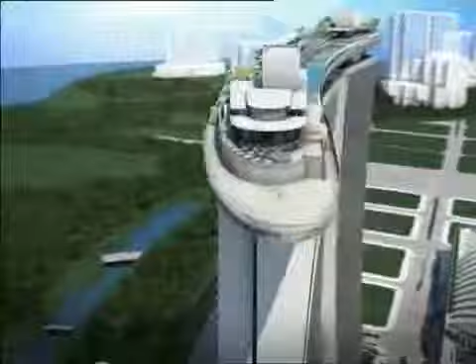Singapore's Marina Bay Sands is one of the world's most complicated construction projects. Engineers have to build not one, but 3 skyscrapers that will shoulder a sky park as big as an aircraft carrier. Worst case scenario, we get stuck.

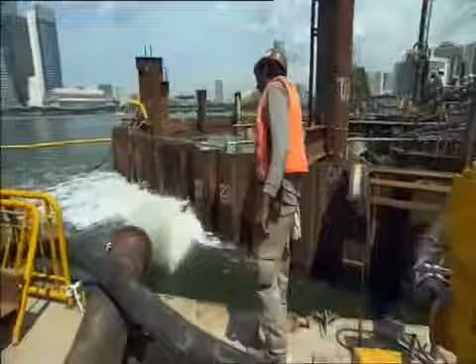They have to devise ingenious solutions to assemble a 60-metre tall museum of impractical dimensions, install giant artworks, and erect seemingly floating pavilions for shopping and entertainment. If engineers succeed, they will create a virtual city unto itself.

Singapore, the Southeast Asian country, is smaller than New York City. The lack of space forces it to build its largest leisure and entertainment hub to date on a small tract of reclaimed waterfront land. The Marina Bay Sands. It's not one megastructure, but many. Serious challenges lie in the array of buildings that form the unique complex.

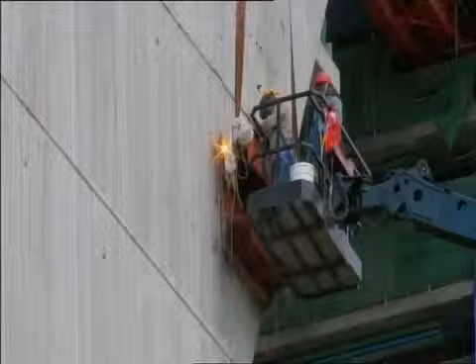3 55-story hotel towers slope at such great angles, they're in danger of buckling under their own weight. An even bigger problem is the hotel's roof. A 340-metre sky park spans its length, containing gardens, outdoor pools, and the world's largest cantilevered observation deck. But how do you build something as big as an aircraft carrier, 200 meters in the air?

In the hotel's atrium, mammoth works of art have to be somehow incorporated into the architecture. Its challenging centerpiece, a 15-ton mass of steel by a renegade artist from Britain. A 60-metre tall art science museum is designed for maximum visual impact. It will be to Singapore what the Opera House is to Sydney. Only one problem. It seems too impractical to construct.

And a set of dramatic glass-encased pavilions, while themselves pose little challenge, have to be built in water. The man behind the Marina Bay project understands the risks, but he believes that anything short of astounding will fail. Sheldon Adelson, one of the world's richest men and CEO of Las Vegas Sands Corporation.

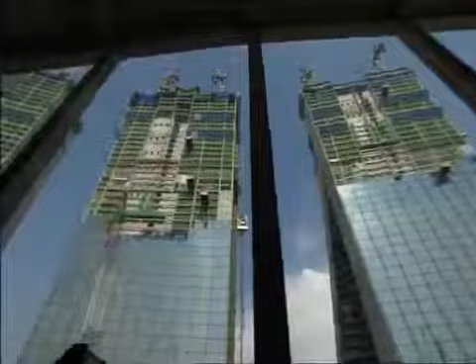What we hope to accomplish is to change the face of Singapore tourism. So we expect a very successful development. That is by far the largest and most expensive single project we've ever undertaken. It'll cost about 5 to 5.5 billion US dollars. It's a lot of money. Now, I know $1 billion doesn't buy what it used to, but by any measurement, it's a lot of money today.

Adelson believes his huge investment is safe in the hands of Moshe Safdie, a world-renowned architect. Safdie is recognized for his use of dramatic curves and geometric patterns. The Marina Bay complex will be his largest and most difficult project yet. I think that architecture has to be timeless. Therefore, what it espouses, what it provides, needs to be something that has a long life.

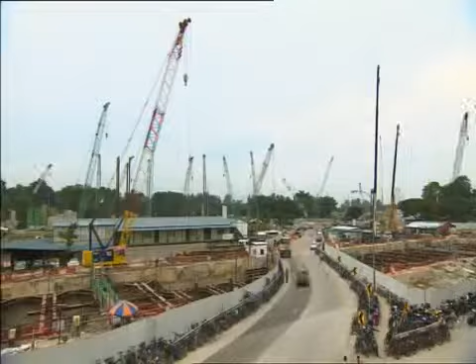What's unique about Marina Bay is all the pieces coming together. You can't think about it as individual buildings. You've got to think about it as a piece of city. It's much more a symphony than it is a sonata. On the ground, engineers are more concerned about the reality of building Safdie's vision. This is the north retail section area.

30-year veteran John Downs is in charge of overseeing the entire project. The design is very, very diverse, and each component of the project is totally different from the others. For a project of this size, with the planning, the design, the construction, you'd be expecting somewhere between 6 to 7 years. Here is basically a 3-year turnaround.

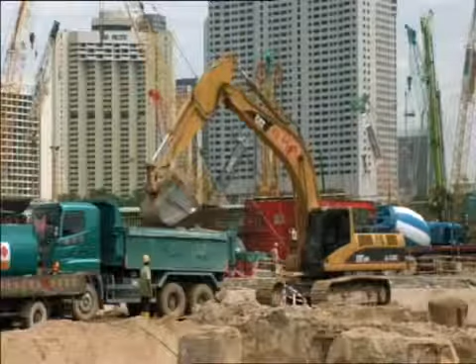The first and most critical construction task is to secure the footprint, though this normally straightforward job proves otherwise, since the site was originally allocated for boats. The complex sits on 560,000 square meters of reclaimed land, part of a decade-long plan to revamp Marina Bay, a former saltwater estuary that's now a freshwater reservoir.

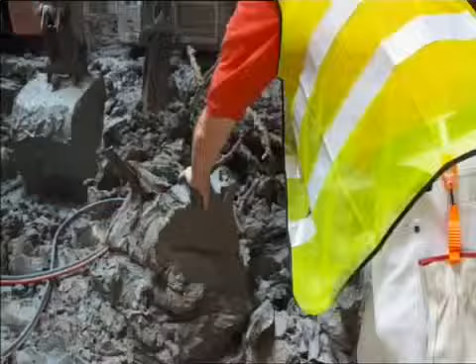Beneath the reclaimed land, which is essentially a seabed, is a dangerous layer of marine clay. Sometimes called black toothpaste, marine clay has very poor structural properties. If not given complete respect, the unstable marine clay is potentially fatal. In 2004, Singaporeans discovered the lethal consequences firsthand. A routine excavation in an underground tunnel for the mass rapid transit network causes a collapse, creating a gaping hole in the Nicoll Highway, killing 4 workers.

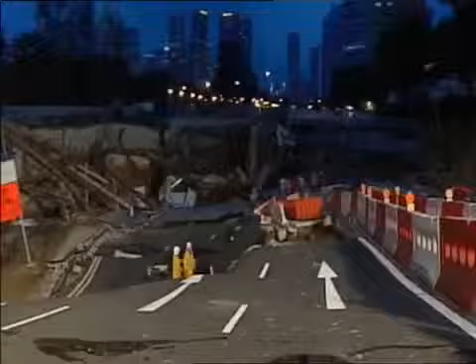The ground conditions in which they were building the Nicoll Highway were not dissimilar to those we are encountering here. They had also soft clay, they had similar depths of excavation between 20 and 37 meters. One of the big things that was learned in the Nicoll Highway collapse was the importance of monitoring movements and the control of quality as the construction proceeds.

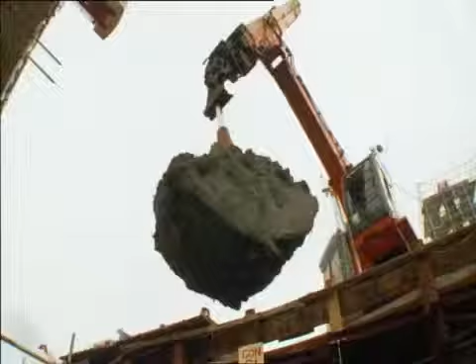Marine clay is an old foe of engineer Mike Barton. He's defeated it in the past by understanding how it behaves. The big problem with marine clay is that it is so soft that when you dig out the inside, the walls will move and potentially collapse and allow all the surrounding water in the bay into the excavation. So, before work can begin, the unstable building site needs major fortification.

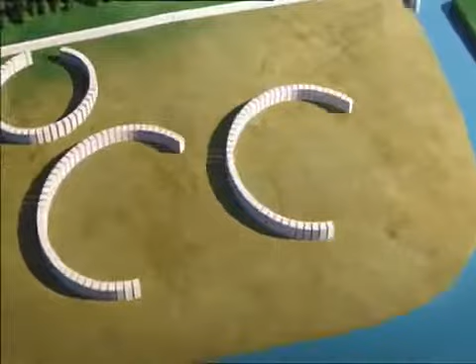To combat marine clay, engineers decide to build giant concrete walls to create stabilizing perimeters for the larger buildings, known as diaphragm walls. Up to 1.5 meters thick, diaphragm walls are steel-reinforced concrete sections, pounded 50 meters into the ground. They form watertight enclosures for men and machines to work round the clock.

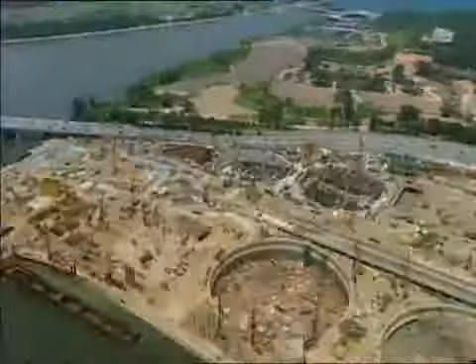In just 1 year, over 4,000 meters of diaphragm walls help produce a rock-solid foundation. The diaphragm walls that we constructed in a formation which we called a peanut formation, which is 2 circles joined together, and a donut formation, which is circular, is that they are able to withstand very, very large forces from the marine clay without any movement. They encapsulate an area that's bigger than a football pitch that enables us to excavate very quickly and to build structure up very quickly.

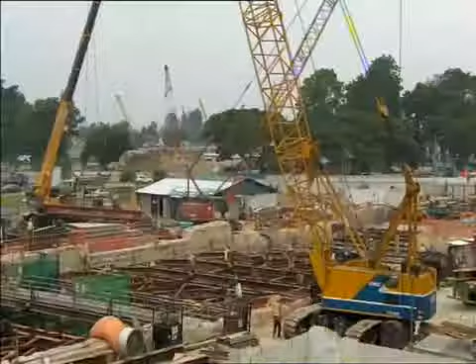Securing the footprint of the Marina Bay project has already taken a year out of John Downs' schedule. He now faces the difficult task of erecting the resort's many buildings in a space of just 2 years. Just managing the whole logistics of that, including the construction methodology, is very, very challenging for us. To meet his tight deadline, Downs chooses the most direct solution. He hires 16,500 workers to construct every single building, simultaneously. It's like leading a small army. So organizational excellence is key.

We're just on the edge of Singapore in the CBD here. So rather than lose the contractors and the workforce to go off-site, we built our own 3-story project office. We have all of our contractors, our subcontractors here. We house our resident site staff. We have our project management team. We have our construction management team, our design management team, and the logistics here.

Come lunchtime, the monster workforce creates another massive challenge for Downs. He responds by building one of the world's largest site canteens. We've got 13, 14 different food styles here. You can see by my shape and size that I eat here every day. I enjoy this food. So here you can see the project bakery. It has its own ovens. It's set up for breakfast. We cater for sandwiches during the course of the day. Can I take a sausage roll, please? So, freshly cooked food, straight from the oven. We stand by our products.

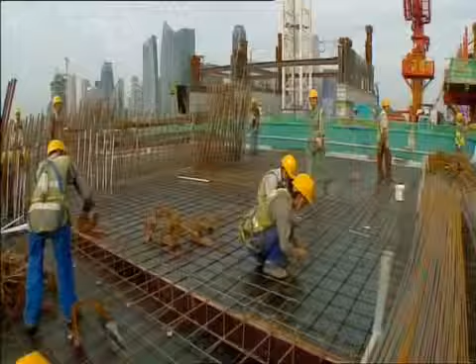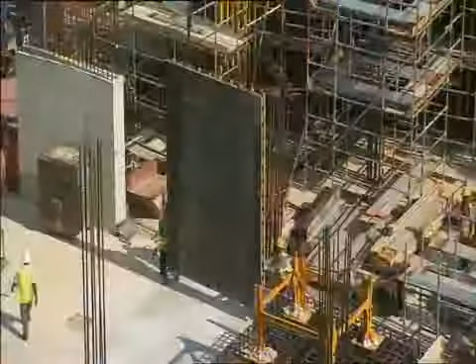The tight schedule also creates problems at the hotel towers, where engineers are already struggling with a congested site. The important thing to do is to make sure that they come in and deliver the goods straight away and then get out again. We don't want too many vehicles on site at the same time. To speed up construction and alleviate traffic congestion, engineers turn to a method that's proven itself countless times in the field: precast concrete. Hotel walls are made off site in the thousands. And workers laying the floors are so proficient, they produce 1 floor per 4-day cycle. It's an impressive display for a conventional solution. But the structure they're attempting is anything but conventional.

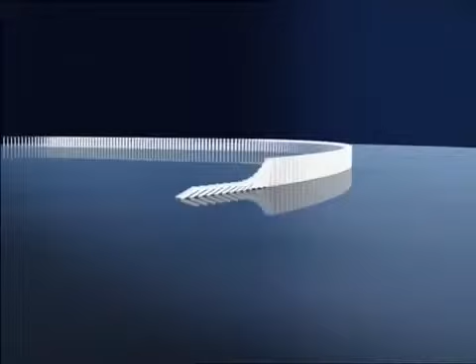The key challenge of building the hotel towers is its unusual design. Unlike other skyscrapers, part of the towers slope at incredible inclines. Like a set of collapsing dominoes, the towers could buckle under their own weight if a practical building solution is not found. It's a major concern for engineer Craig Glover. I've been in the industry for 25 years, done a wide range of projects in many different countries, but nothing compares to this whatsoever. There was nothing we could take reference from across the street on the next high rise or across town. This is a new frontier.

Costing a staggering $5.5 billion to build, the Marina Bay Sands could be one of the world's most expensive mistakes if engineers can't solve the tower's problematic structure. Engineer V.C. Cheong leads the design team, and their solution comes out of left field. If you look at the configuration, it's not a straight tower. It's with a sloping leg. So all this sloping leg actually is inducing a very huge external force onto the structure. We cannot build it without any support. So we actually formulate a solution to prop up the sloping edge.

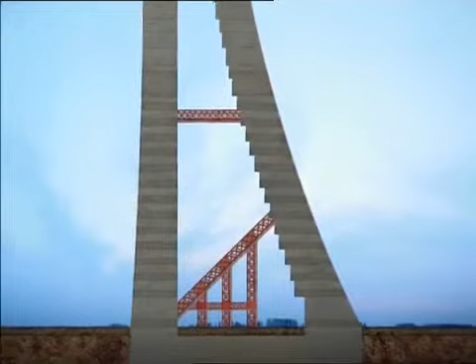Using a technique they've never employed before, engineers build large temporary struts made of strong structural steel. They prop up the sloping towers as they rise. Like a suspension bridge, high tensile steel tendons, also known as tension cables, give an added layer of support inside the walls. In theory, both the struts and the tension cables are temporary and will be removed once giant link trusses connect the towers at the 23rd floor.

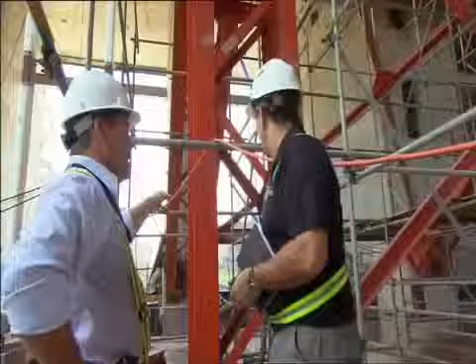The sheer weight in concrete is enough to topple the towers at level 8 if the engineer's calculations are wrong. To reduce the chances of failure, Glover and his team make a radical decision. Instead of removing the temporary tension cables in the tower walls, they make them permanent supports. I feel good it's in there because it's added strength, it's added support.

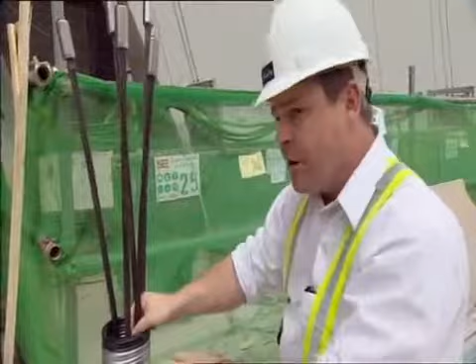We have a twined network here of high-strength steel, and what we do is we bundle these up so they form a cord with multiple strands inside this conduit. We place this conduit inside the walls prior to casting the concrete. Once the concrete is cast, we anchor one end into the concrete. We then put a very high-strength pneumatic jack onto the collar and one by one pull these strands through and tension them up. What that does is basically pull the building back and hold it in place.

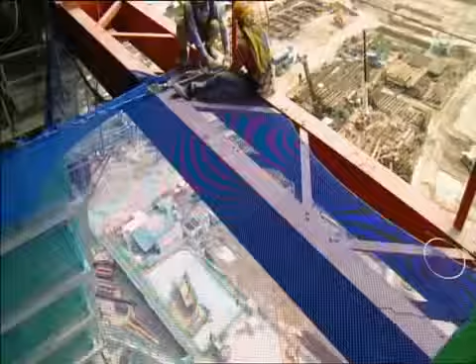If these cables were to suddenly break or if they weren't in place, we wouldn't be able to control the self-weight as we build more and more of the building up. So it's a very important part of the actual engineering of the solution to hold the building in place until we can connect it. Despite the team's quick thinking, the true test of their engineering decisions will only happen once the main support struts are removed and the massive link trusses installed.

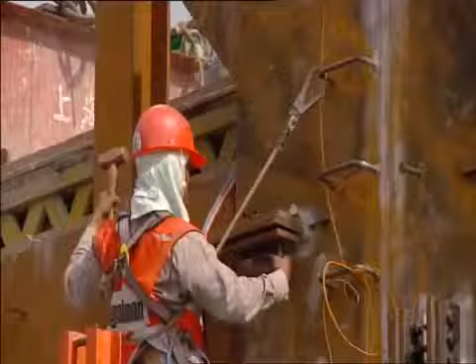Link trusses are huge reinforced steel brackets that bind the towers at the 23rd floor. Once their installation is complete, they transfer the sloping tower's weight completely away from its temporary struts. Once we're satisfied that we don't have any stability issues, then we can bring the large hydraulic cranes in and member by member start to dismantle the struts. We've got a lot of time pressure, so we've just got to make sure that these things keep moving. It's done its job holding up the building, now it's holding up the job.

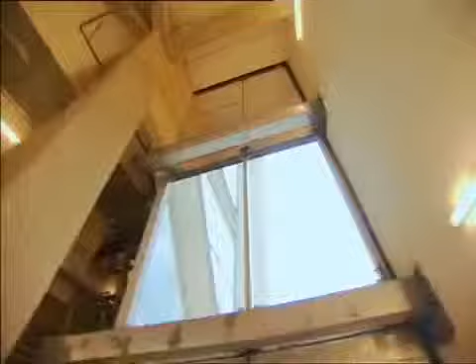As the last pieces of support struts leave the site, Glover and his team can finally breathe a sigh of relief. The link trusses are holding the building load. So far, so good. It's a lot of theory, a lot of calculations, but until you really do it and really get it out of the building, you never quite know. I'm always waiting for the phone call in the middle of the night that something's gone wrong.

Not all the structures have ended up according to plan. The 60-meter-high Art Science Museum is facing a major design overhaul. Planned as a venue for blockbuster exhibitions on the arts and sciences, its bowl-shaped roof doubles as a 3,000-seat amphitheater. Unfortunately for engineers eager to start its construction, architect Moshe Safdie isn't happy with its current shape. Somebody looked at them and said, looks like a bunch of bananas. In fact, Mr. Adelson said, looks like a bunch of bananas. I said, well, if they look like a bunch of bananas, we're not there yet.

It's terrible news for Safdie's design team, especially its principal, Gene Dyer. There are times that Moshe will come in with an idea. We think it's quite exciting. We'll pursue the idea for weeks or even months. He'll come back and say, I want to change the idea. And we've already bought into the idea, so it's a bit frustrating.

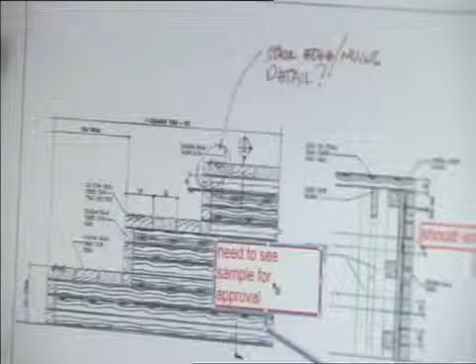To rework the unique geometry and dimensions of the Art Science Museum, Safdie and his team turned to advanced 3D modeling programs. It not only makes navigating the museum's complex geometric patterns easier, it shortens the process to a matter of days. The model is dynamic and it can be moved by just changing one or two elements. Moshe could experiment. He could make rapid judgments in a very short period of time about which way he wanted to take the project. This is a process that was impossible to do 10 years ago. Without the computer, this would take years and years and years.

Nautilus form effectively became... To rationalize the new look into a buildable structure, architect David Robbins splits the museum into spheroid segments. We began to look at using different spheroids to define the different upper and lower surfaces of this building. That gave us a very rational way of describing the plan form to our clients.

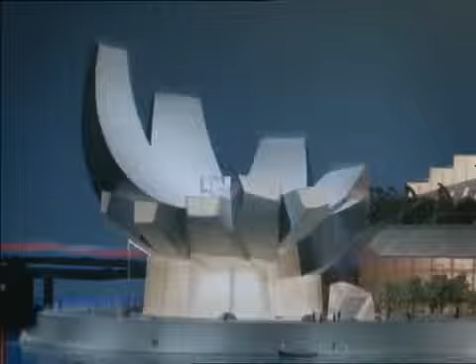After months of refining the design, Safdie is finally happy with the result. The mathematical precision that we gave them made them even more beautiful. It led some people to say, well, hand of welcome. Others said, is that a lotus? And the more ambiguous the associations, the closer I thought we were getting to our target. Because I think the least exciting buildings are those which have overt symbolic associations.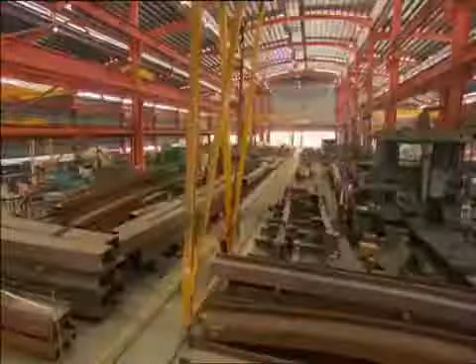Armed with the new design, engineers begin work on the museum's 60-meter-high superstructure. A staggering 5,600 steel elements, weighing some 5,200 tons, are prefabricated to exact specifications. They are then trucked onto site and assembled. It's like putting together a giant jigsaw puzzle. Each element has to be installed with pinpoint accuracy. If it's even a few millimeters off, engineers will have to start from scratch. Engineers of the massive atrium at the base of the towers are facing an equally tough construction process.

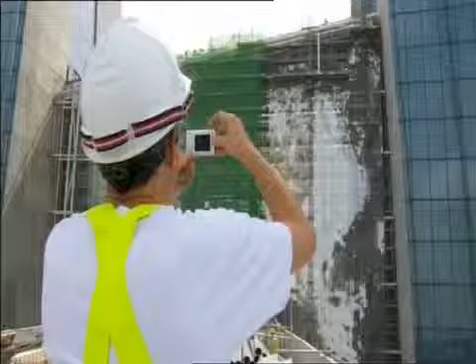Safdie has come up with a challenging design. He wants to inject art into the atrium's architecture, so that visitors will feel like they're walking through a grand Gothic cathedral. In medieval times, if you think of a Gothic cathedral, there's the architecture, there's the stained glass windows, there's the sculptures on the pinnacles. You cannot draw a line and say art and architecture. Art and architecture are one, they're singular experiences. And I think what we try to do here is come back to this integrative mode.

To create the centerpiece of his vision for the atrium, Safdie commissions renowned British sculptor Antony Gormley. Famous for his unusual approach to art, Gormley is the brains behind the Angel of the North sculpture in northern England. What he's about to attempt is proving to be more of a construction challenge than an artistic one. A cloud-like sculpture some 40 meters long, made up of 15 tons of high-grade stainless steel, hung 12 stories above the atrium.

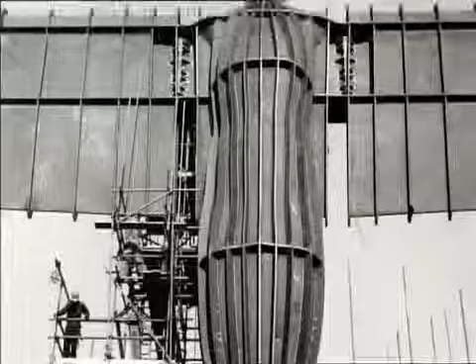The Angel of the North is, in a way, making a very traditional public sculpture because it's isolated in space at the edge of a valley. You can see it for miles and miles. It's very much about occupying space. This is about activating space. You can't see it for miles and miles. You have to be in the space with it. Each viewer, every person coming out of their hotel room will confront this big chaos thing and have to find their place in it. I think that's an exciting thing.

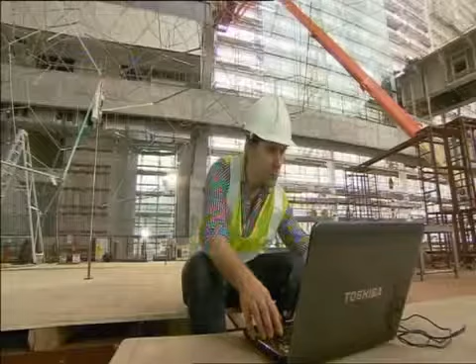Called Drift, Gormley's steel sculpture is so huge and so complex that it can't be sculpted using traditional methods. Gormley's team has to create state-of-the-art 3D computer programs that translate his ideas into buildable plans. But just as they're about to begin construction, a bombshell drops. September 2008, a global financial crisis wreaks havoc on markets. The flow of the hundreds of millions of dollars that keep the Marina Bay project going every month suddenly stops.

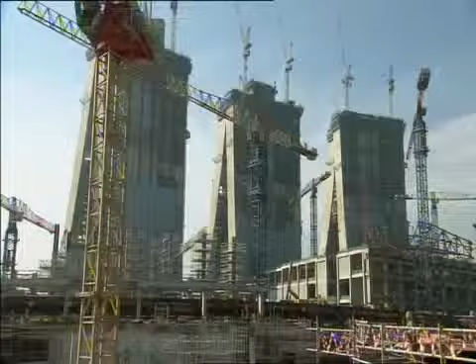For engineer Matthew Pryor, it's a massive blow. I feel devastated. It couldn't be worse. Probably the worst day of my life professionally. There's no more money coming through. So unless we put some funding in place or there's something, we're going to have to shut the jobs down. There's a tough decision to be made, and we don't know what we're going to do just at this point in time. With the future of the multi-billion-dollar project plunged into doubt, all eyes turn to the man behind it, Sheldon Adelson. The next move of one of the world's richest men will determine the fate of the mega construction site.

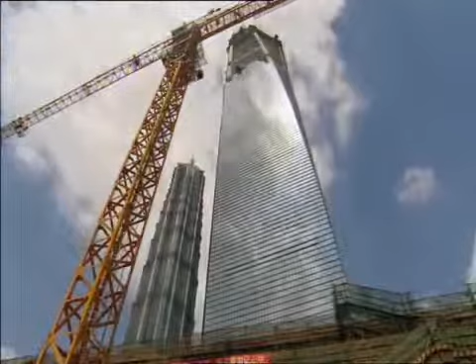The 2008 global financial meltdown is a haunting echo of the 1990s Asian crisis. Back then, progress on Shanghai's World Financial Center came to a complete halt for 5 years. For Adelson, that's simply not an option for the high-profile Marina Bay resort. His vision of changing the face of Singapore tourism is at stake. And so are billions of dollars of investment from his Las Vegas Sands Corporation. He prefers finding a stopgap solution to weather the storm. Throughout history, there has never been a trend that went straight up, nor a trend that went straight down. So it goes up and down. It's only a matter of time when things will recover.

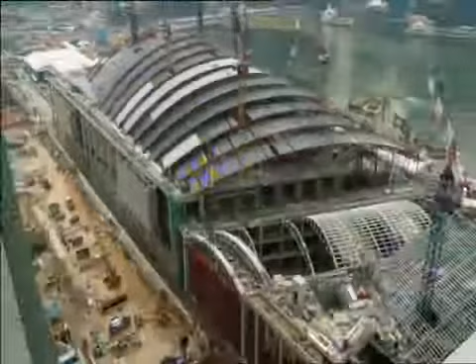In a bold move, Adelson pledges his vast personal wealth to the completion of the project, effectively ending any speculation of failure. There's a massive sense of relief in the company. Everyone pleasantly surprised how quickly we've got through this and the fact we could hold it together and get it going again. So euphoria is probably the best way to describe it. With the crisis averted, construction on the three 57-story hotel towers, the casino, theatres and convention centre resumes at pace. Everywhere you turn, steel is being installed. It's vital reinforcement for every concrete structure on the 15.5-hectare site.

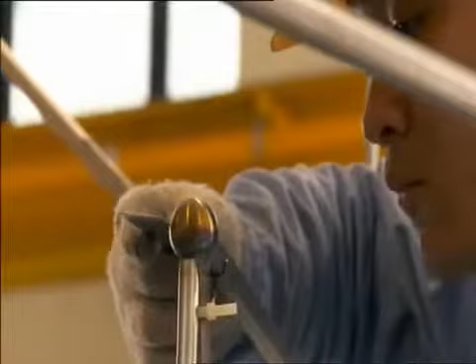For one project at the tower's atrium, steel is more than just reinforcement. To construct the 15-ton Drift sculpture by British artist Antony Gormley, engineers had to first laboriously prefabricate it into over 70 segments. The segments are then welded into 8 slices and will ultimately form the sculpture. It's a tricky operation, but engineers are able to complete it swiftly due to a system of codes and numbers that enable them to quickly identify what goes where.

Once all 8 slices of Drift are fully assembled, it's lifted up into position by a temporary lifting frame. A massive box truss on the atrium ceiling then takes over the load. In theory, the box truss will support the weight of the lifting frame as it's being lowered down. It will be a heart-stopping moment, especially for engineer Graham Stevenson. The lifting frame is about 9.5 tons, so when it picks up and gets some momentum, there's a potential that it just wants to flick over and rotate through its full 90 degrees, and we won't have it under control.

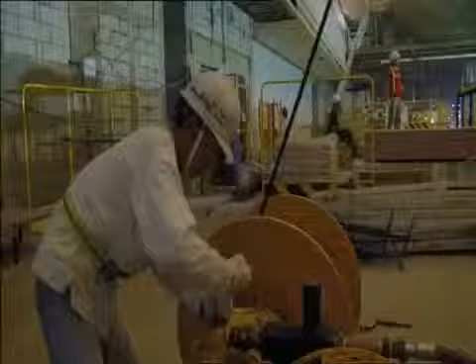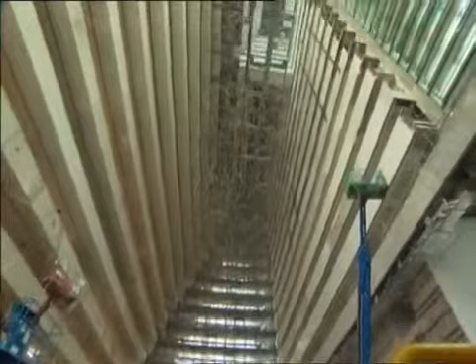Stevenson's solution: 4 powerful automated hoisting drums located at the 4 corners of the frame. They allow workers to control the strength and speed of the operation with high tensile steel cables. A spotter at the top determines the pace of the procedure and marshals the team. With their preparations complete, it's time to face the moment of truth. Sculptor Antony Gormley is as anxious as any of the team.

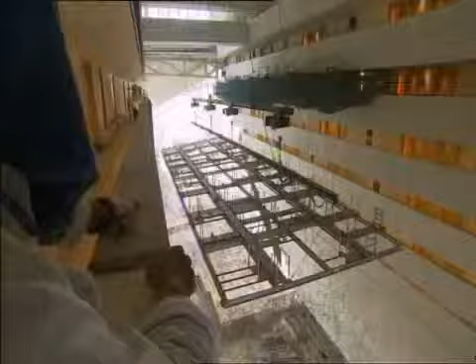The entire operation is estimated to take up to 10 hours to complete. As soon as the frame is in motion, there's no turning back. Midway through the lift, Stevenson receives reports of a potential problem. 22-story, number 7 temporary cable, scaffolding touching the cable. Why have you got the temporary cable touching the transverse? Yeah, but. But is it just the end of a tube? Yeah. So you can just cut the tube? Yeah. Problem solved.

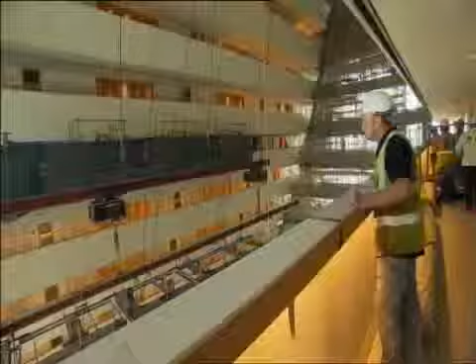But what was previously an estimated 10-hour procedure now turns out to be a 24-hour marathon lift. At 6 a.m. the following morning, they complete the job. Absolutely fantastic. The Gormley is now finally in its final position, so really an end of a long and exhausting day, and big thanks to everybody, but it's finally done.

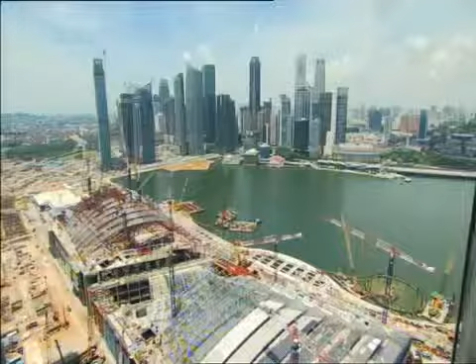While the Drift settles into its new home at the hotel atrium, elsewhere attention is focused on one of the project's key features, the Crystal Pavilions. The two glass-encased buildings by the promenade are set to be the resort's premier shopping and entertainment complexes. But before engineers can make them a reality, they have to secure their footprint. And already a major obstacle threatens to sink their objective. The Crystal Pavilions are situated within the confines of Marina Bay. So to found it, engineers have to find a way to build in 6 meters of water.

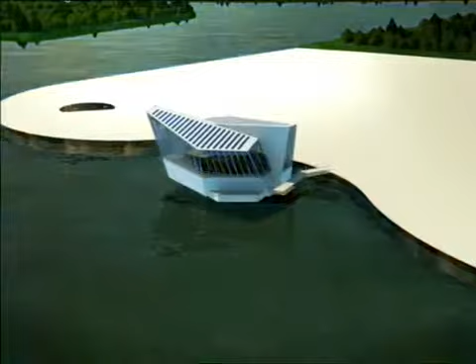The responsibility of tackling the problem falls on the shoulders of engineer Kurt Vella. I'm from Sydney. The underlying foundation in Sydney is sandstone, it's rock. All you need to do is just dust off the surface and you can build skyscrapers on it. Here it's very different. All the structures have to be heavily founded.

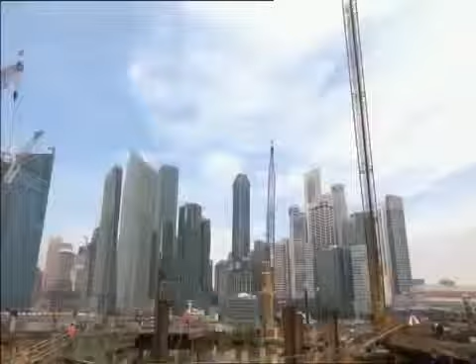To keep water out of the construction site, only one solution seems viable for Vella and his team: a waterproof steel structure called a cofferdam. This temporary formation surrounds the worksite with a circle of steel sheet piles, creating an impenetrable shield that locks out the water, keeping the workers safe within. For the job, they rope in a 12-ton vibro hammer. It punches the sheet piles deep into the earth, making the cofferdam rock solid and resistant to movement.

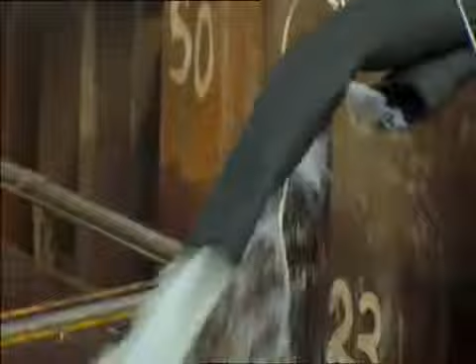With the cofferdam secured, engineers deploy powerful diesel pumps and run them 24 hours a day, ejecting any water that remains within the walls. This last step comes with inherent dangers. The force of the water outside creates what engineers call hydrostatic pressure. In theory, it's powerful enough to force water through any gaps in the cofferdam. It's something that Vella prays will not happen.

There's a bit of hesitancy and concern because we've got to build this building in the middle of Marina Bay. Everybody can see what we're doing, so if it leaks, it's a problem. If it fails, if it moves, if it collapses, it'll be an absolute catastrophe. After a day of pumping, Vella's worst fear comes true. Parts of the cofferdam are leaking.

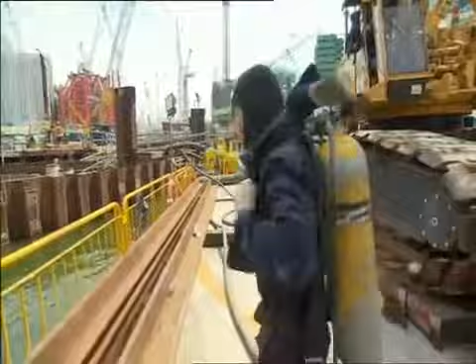To rectify the problem, Vella orders a team of 8 divers into the water on 10-hour shifts. Their mission? Find out where the water is being forced in and plug them shut with epoxy resin. Anson Lee is an 8-year diving veteran.

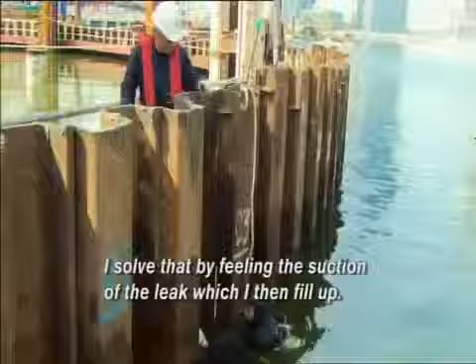The toughest part of my job is the environment. The visibility is poor here. It's totally zero, I cannot see anything here below. I solve that by feeling the suction of the leak which I then fill up. You have to overcome all the fear that you can't see under the water, but okay lah. I feel proud to be one of this team to build this thing out.

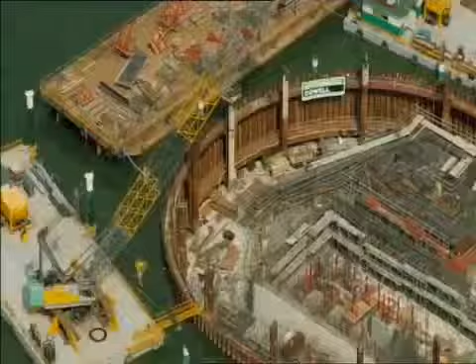After 2 weeks of hard work by divers and the pump crew, the job is finally complete. Kurt Vella can also breathe easy. Every job is different, every job has its challenges. You plan and prepare, you try and identify your risks in advance, and you try and come up with contingency plans. And that's what's really enjoyable from my perspective. That's what gets me out of bed in the morning.

After 2 years of battling the elements and overcoming difficult construction milestones, the 3 sloping towers of Marina Bay Sands can finally celebrate their topping off ceremony and move on to the next phase. But a destructive force of nature threatens to throw a spanner in the works. With climate change predicted to affect the pattern of Southeast Asia's typhoons, Singapore may one day experience the destructive tropical storms plaguing its northern neighbors in the Philippines and Taiwan.

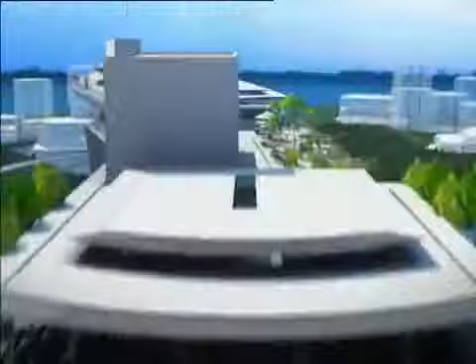When that happens, typhoon-force winds could spell disaster for the hotel towers, especially the 340-meter sky park sitting on top of it. The force of the wind can make both buildings sway dangerously, causing irreparable damage to the structures. The Sky Park, offering 360-degree views of Singapore. The visionary design will have enough surface area to park 4.5 Airbus A380s.

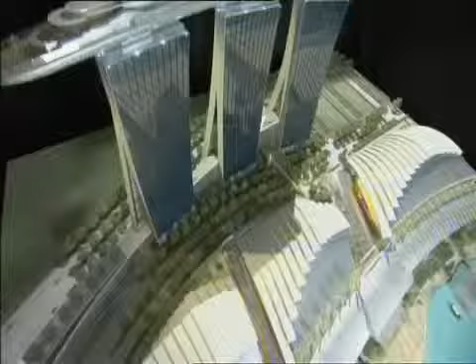Safdie's revolutionary idea scores points for ingenuity, but it clearly isn't what nature intended. Typhoon-force winds threaten to rock the towers and its sky park, causing unimaginable damage. If engineers are to make the building a reality, they'll need a rock-solid solution. Still got to do all this cladding, but yeah. Engineer Tony McKee has little time to make things happen. At the moment, we're running a couple of weeks behind what we'd originally planned. We're not entirely happy about it, but at the end of the day, we've got to do this safe and we've got to do it properly. You're safe, close to the...

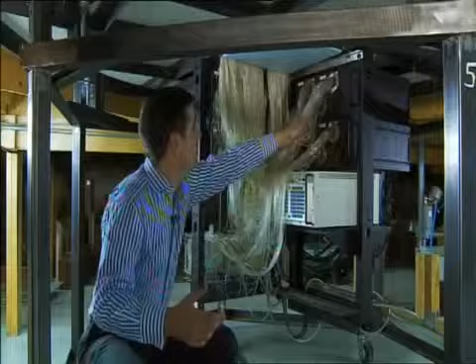To fight the enemy, McKee knows he has to first understand the enemy. He hires leading US wind engineers CPP to carry out extensive testing on the towers and Sky Park. Their mission? Find out how Singapore's potential wind forces affect the buildings. We turned that upside down. Wind engineer Roy Denoon oversees the process at their state-of-the-art wind tunnel in Fort Collins, Colorado. The thing that makes this really special is the fact that we have this sky park running across the top, linking all the towers together.

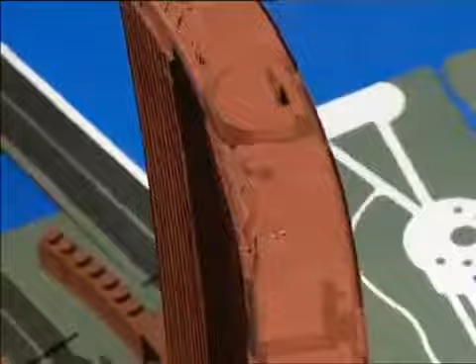So whereas normally with a normal tower, we'd measure the loads on the tower in isolation, with this one, what we're needing to do is to measure the loads on all 3 of the towers at exactly the same time. So that way we can know how the towers are going to move relative to each other, so we can make sure that they're not going to put excessive strains or movements into the sky park. During the tests, a scale model of the Marina Bay Towers is blasted with 40km/h winds to simulate faster typhoon winds in reality. Over 1,000 pressure measuring instruments inside the model register how the winds affect the buildings. At the end of the tests, engineers confirm that the 3 towers can deform by some 200 millimeters during the fiercest storm.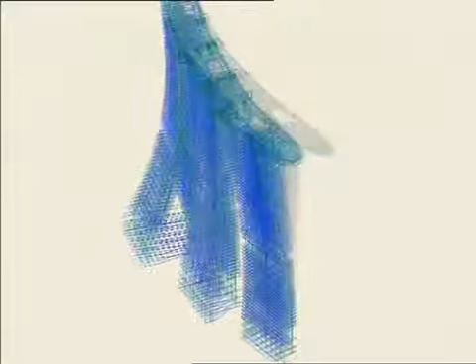Engineers quickly figure out a solution: movement joints. Inspired by bridge engineering philosophy, movement joints are essentially gaps located between the concrete towers. The huge gaps allow for movements of up to 250 millimeters. Aluminium and stainless steel plates act as sliding components. They can move back and forward over each other, a little bit like you'd see in a flexible bus, where you have that articulation happening in the middle. It's a similar concept to that. To accommodate the differing movements of the three towers, engineers install multi-directional steel bearings below the sky park. The solution scores major points with Tony McKee.

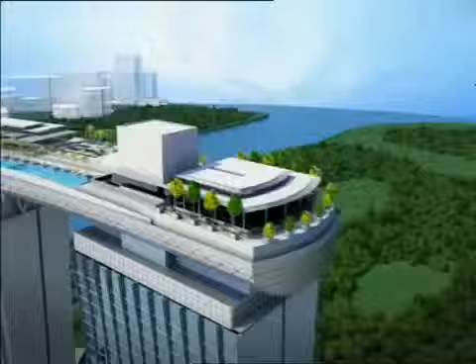Only one problem. It won't work with a rigid structure containing 1.5 million litres of water. Any movement in the joints could fracture the Sky Park swimming pool, endangering lives and property below. With the help of US pool builders Natare, McKee quickly develops a solution, but it's completely unproven. A secondary system of movement joints built into the pool itself. The plan: to split the pool into 3 smaller 50-meter units. Steel top hats then conceal the gaps. Huge basins catch any runoff pushed up by the moving pools.

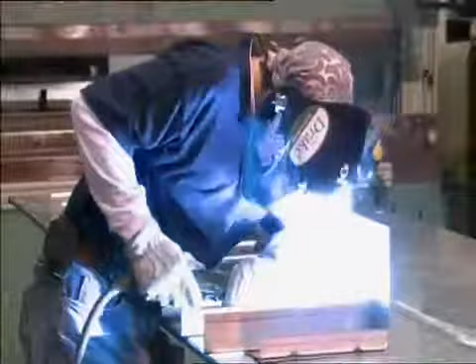McKee knows he only has one chance at making this work. So he commissions a trial by water. What we've got here is the side of the swimming pool, which replicates the movement that we're going to get between the towers. And what the Natare guys have come up with here is a simple track system which can be pushed back and forward by a forklift. And that replicates the full range of motion that we have on the swimming pools, which can be 0 to 250 millimeters either way.

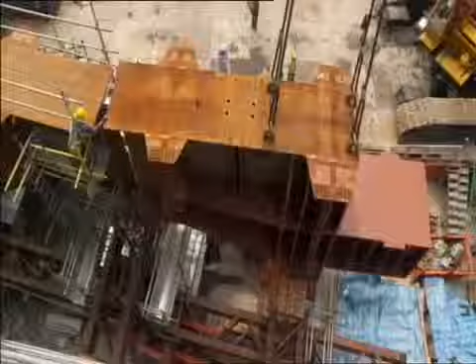It takes engineers weeks of testing before they're completely satisfied. Armed with the final results, McKee can now safely begin construction of the Sky Park. Consisting of some 10,000 tons of steel, the Sky Park is as big as an aircraft carrier. The most practical way for engineers to construct it is to break it into 14 segments on the ground before assembling it at the top of the towers.

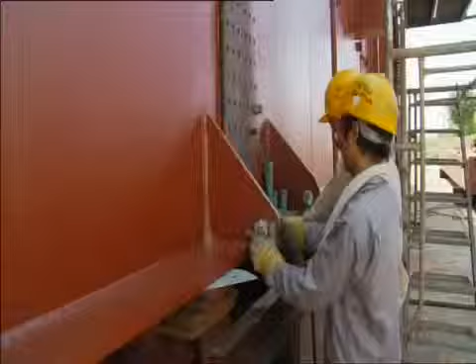There's no room for miscalculation at 200 meters in the air. Each segment is carefully prefabricated and tested by steel specialists Yongnam, and then trucked to the site independently. From the very beginning, McKee and his team anticipate that their biggest challenge will be lifting the 2 largest segments of the Sky Park, the box girders. Measuring 80 meters long, their combined weight is a staggering 1,400 tons.

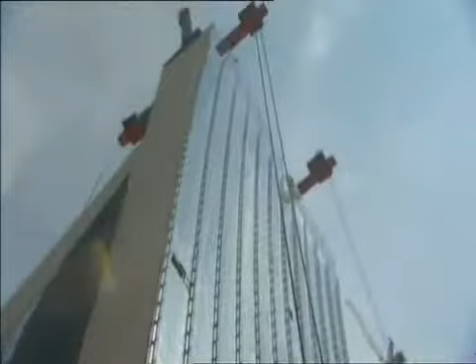How do we feel? A little bit of apprehension. You know, it's a significant lift that hasn't been done before. If something goes wrong, it could be really significant for us. To reduce risks, McKee turns once again to proven bridge building technology. In a process known as strand jacking, giant temporary lifting gantries made of strong structural steel will use powerful hydraulic jacks to lift the box girders up to the top of the towers before sliding them into place.

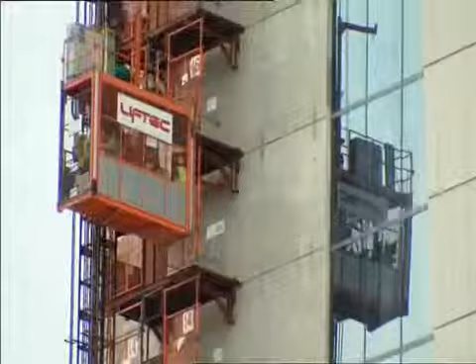It will be the longest and largest lift of its kind in the world, and McKee needs the best in the business. He puts a pioneer in the field in charge: Swiss-French company VSL. Engineer Eddie King and his team have successfully raised bridges, stadium roofs, and even Ferris wheels. The toughest part of my work is you have to plan everything very precisely, because everything is set up in millimeters. So we have to lift up, slide it in and position it in 5 or 10 millimeter accuracies. If we don't do it properly or safely, the biggest hazard is the thing can fall down to the ground.

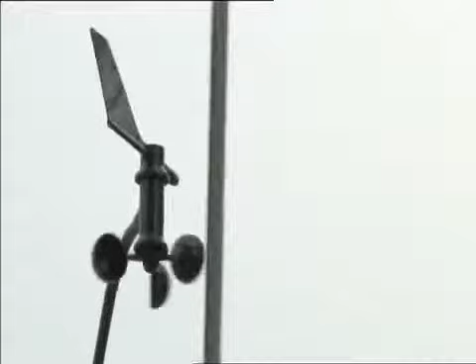Other factors further complicate the lifting process. Due to an increasingly tight schedule, the team is forced to conduct the lift during Singapore's annual monsoon season. It's almost impossible to predict when a tropical storm will hit. When it does, the accompanying lightning strikes can endanger lives. And because the whole operation takes place meters from a jam-packed highway, curious onlookers will be able to see any mistakes the engineers make. It's a potential public relations nightmare.

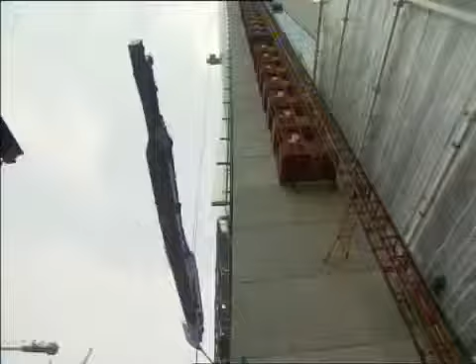Worst case scenario, we get stuck. And then we've got to figure out how to release it, how to continue lifting, because basically once we get going, we keep going. Okay, people, okay? Okay, now I stop now. During an estimated 16-hour lift, the box girders will move at a cautious 14 meters per hour. Eddie King and his team constantly check their weather gauges for any incoming storms. The hydraulic jacks are also inspected regularly for overheating. No one wants the operation to stall in mid-air.

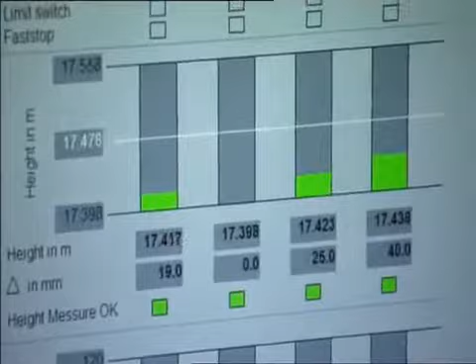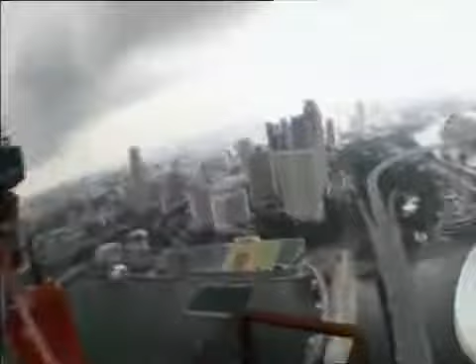Despite the team's best efforts, Mother Nature catches them by surprise. Okay guys, rain is coming. It's better we stop here. An approaching downpour threatens to grow into a lightning storm. We are at 200 meters above and the surrounding buildings are quite far away. So there's a chance of the lightning striking on a high point like this. So we've got to stop and wait until the weather gets better before we continue our lift.

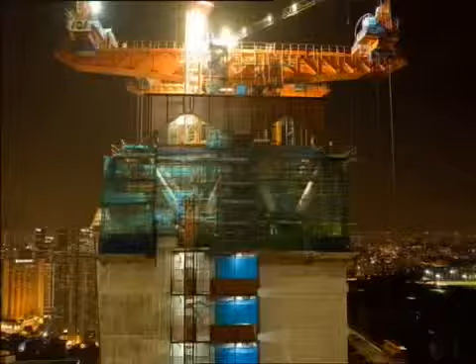McKee's worst fear comes true. If the girders remain stuck at midway for too long, he will have to order them down. Okay. After a tense 3 hours, the lightning threat passes, and the operation cranks back to life. By the time the box girders slide into position, it's past midnight. Everything went quite smooth today, so we hope tomorrow we can do the same. Smoothly bring it in and transfer to the permanent position.

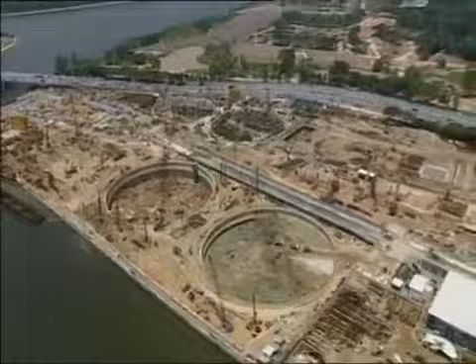With the lessons learned from the box girder lift, the rest of the segments go up smoothly. As the final piece rises into place, Singapore is already marveling at the team effort behind one of the world's most ambitious building projects. In just 3 years, engineers overcame seemingly impossible construction challenges, defeated marine clay, engineered ingenious design solutions, and survived the most debilitating financial crisis since the 1930s. As the finishing touches are put on the resort, the stage is set for an opening party, Singapore style.

Those involved reflect on the project that has already far surpassed their expectations. It's a bit kind of overwhelming, you know. I'm in the process of disconnecting the umbilical cord. It's not easy for an architect. This type of project probably only comes around every 25 years or so. So it's been a lot of hard work, extremely challenging.

I really can't imagine, I couldn't list the number of challenges we've overcome along the way to get to today. Everybody is saying this is kind of a miracle, you know, never seen anything like it. And it's rewarding, it's nice. The Marina Bay Sands, Singapore, proof that with visionary design and engineering know-how, megastructures can still defy the odds and fulfill the wildest dreams.